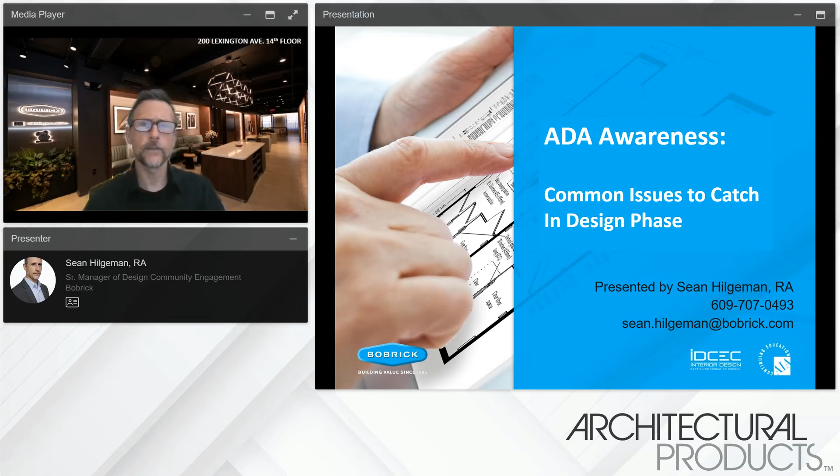Just to give you a background on the presentation, it is derived from our planning guide for accessible restrooms. I think it's included as a download from this presentation, but you can also download it directly from the website. It was written by a gentleman by the name of Alan Gettleman. Alan is a member of the ICC Standards Committee, so he's actually involved in the development of these standards. So this is really from the source. It's not going to be jurisdictionally specific, but we can get down to that granular level of detail in the Q&A, probably in follow-up after the presentation. And again, it is downloadable as a resource. And with that, I will jump right in.

So the description: restroom spaces are common areas of focus in ADA lawsuits. Many of you may have encountered this, where there are individuals who have a lawyer on speed dial and a tape measure, and they catch these issues. And we see a lot of this. We see a lot of change orders. And just to give you a heads up, we're going to share some of these that are the most common that we encounter in the field. They're really pitfalls that can be caught in the design phase.

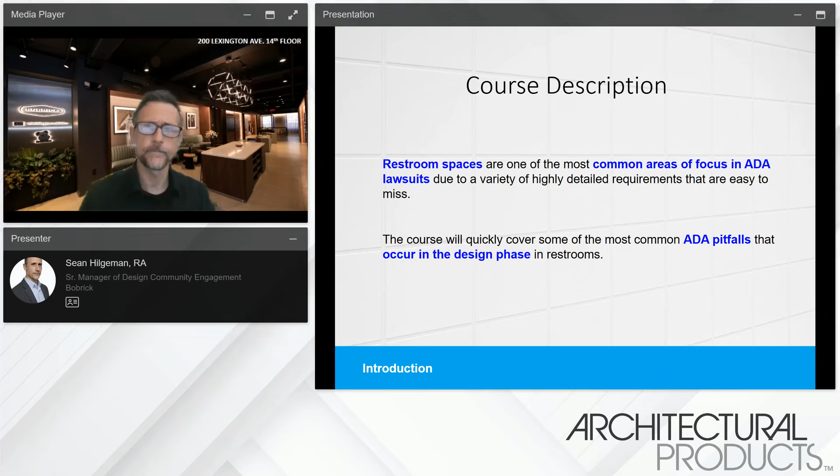Okay. So just to start, we do get a lot of questions about the different codes and standards. And to clarify that, today's presentation deals only with public restrooms. We're not going to go into residential, multifamily, no Fair Housing Act, public restrooms only, because there's plenty of information just in this topic.

So to start, many of you are very familiar with the IBC shown on the bottom right there, that blue document. That is a scoping document. That is really where it all starts for the designer. By scoping, I mean what, where, and how many, as far as requirements for accessibility. The IBC is an ICC, International Code Council, publication. So it is going to refer to the ICC A117.1, which I'll also say ANSI 117.1. That's what the A stands for. It essentially refers out to the A117.1 for technical requirements. So your IBC is your scoping document, what, where, and how many. And then the A117.1 is how high, your dimensions.

And they complement each other. So that's the way these two documents work. They're both publications of the International Code Council. So then you have two versions of the A117.1. You have 2009 and you have 2017. Which one do you utilize?

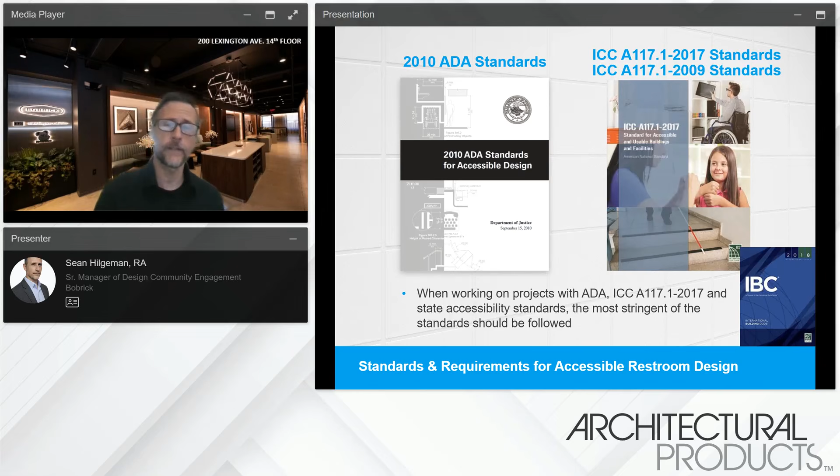But the vertical grab bar in your ADA stall is something that exists in the 2009 ANSI, but it does not exist in the 2010 ADA standards. What that means is if you fail to utilize the vertical grab bar, that is a code violation. It is not a potential civil rights lawsuit. So that's an important distinction. And we'll talk about that as we go through other slides.

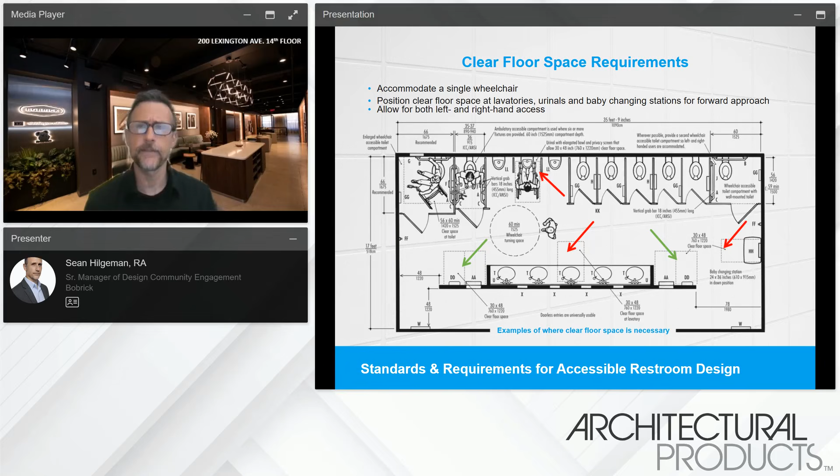All right. So this slide has a fair amount of information in it. Just to start, it is a high volume restroom. What defines it as a high volume restroom is that there's 6 fixtures or more, and that can be 3 urinals and 3 toilets. I think this has 11 or 12, but once it hits that 6 fixture threshold, 2 things are required. The first is that an ambulatory stall, which you can see adjacent to the ADA stall on the left side, is required. And many of you already know what that is. But the ambulatory stall is a requirement in a high volume restroom. You have to have at least one.

The other, this is a very commonly missed requirement. It is something called enhanced reach ranges. And we'll look at this a little closer in an upcoming slide. But once you have a high volume restroom, most jurisdictions require enhanced reach ranges. The primary requirement that you're going to see there is that at least one lav needs to have the ability to turn water on and off and wash the hands within 11 inches from the front edge of the countertop. And we'll look at that again more closely in a moment.

Another note on this slide is that you'll notice that for the most part, it is mirrored. If you have the luxury of this large of a restroom, a high volume restroom is going to have a higher variety of disabilities entering and using it. And you can't assume that all of them are going to be accommodated by just a right hand or just a left hand approach. So by mirroring the restroom, you're actually creating a right hand and a left hand approach to everything in the room. So that is an important note.

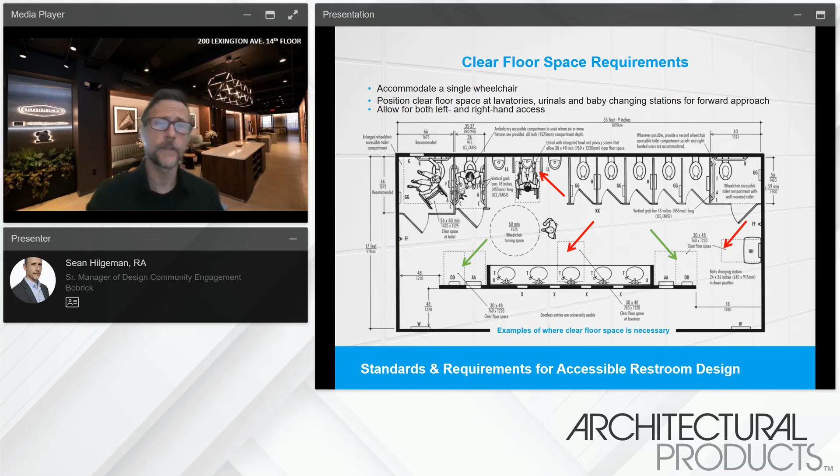So in this case, you can see on the changing station, if a chair is parked there and then another chair is parked at the same time at the hand dryer, you still have your 36-inch clear floor path. So this does happen more often than you'd think, and it's just something to be aware of, making sure you're showing that wheelchair clear floor space on that particular accessory.

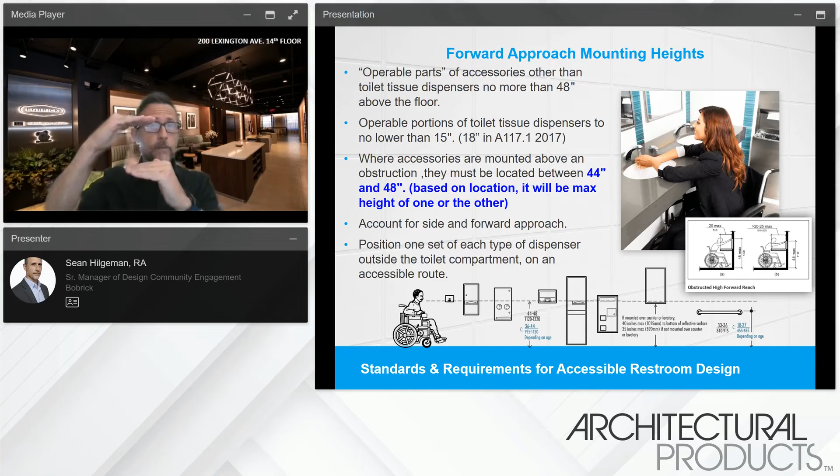Okay, so this is a little bit of a heads up. This slide is talking about the maximum mounting height of the manually operable portion of accessories. And you're going to see in our guide, as well as the standards themselves, this note about 44-48. And it's a little bit misleading because it infers, at a glance, that the manually operable portion of an accessory needs to be set in that 4-inch band between 44 and 48 inches. And that's not what it means.

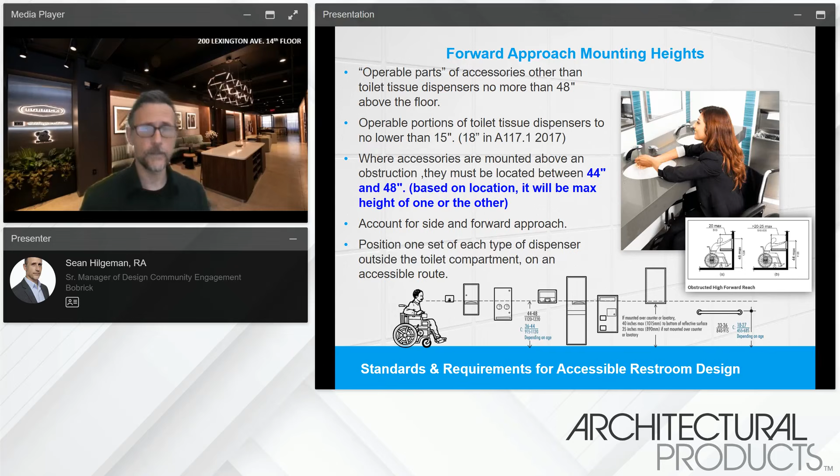For a forward approach, it's going to be either 48 or 44, depending on the situation. And there is a rule of thumb to simplify this because it does get complicated. So the rule of thumb is 100% of the time, your max mounting height for the manually operable portion of an accessory will be 48 inches unless there's an obstruction beneath it. If there's an obstruction beneath it, you have to go in and do more homework. And I'll dig into that as well in an upcoming slide. Okay.

So the important note here is you're setting now your accessory height that we just talked about, and you find that there is an obstruction beneath your accessory. So there's a series of questions that you have to ask, and this is not anything you have to memorize, but as you go back and refresh on it, this will ring a bell. So you have an obstruction beneath your accessory. And the first thing you have to ask is, does this restroom have enhanced reach ranges? If no, you can drop it down to 44. That's for your forward approach.

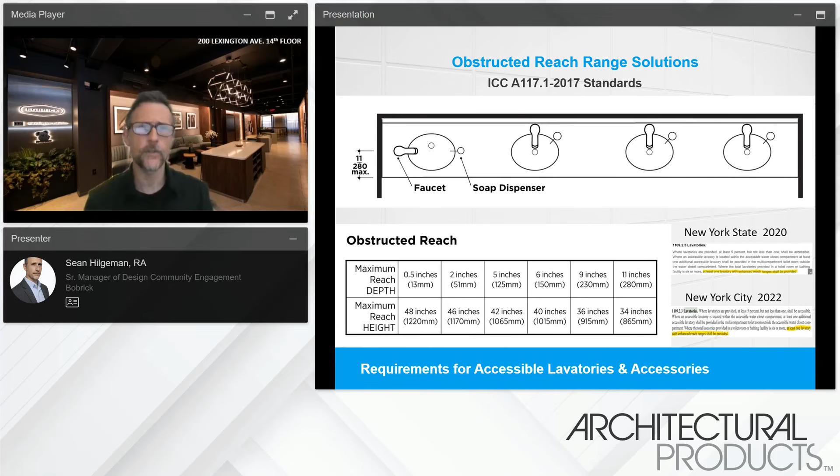If yes, then you have to then ask if you're dealing with a hand dryer or a paper towel dispenser. If the answer is still yes, now you come to this chart that's on the bottom left here, and you can see it's very particular. On the first column there, you can see if you have an obstruction 1/2 inch or larger, which could be 3/4 inch base molding, you actually are required to drop it by 2 inches. That goes from 48 to 46 inches. So the important note is that this is a code violation. It does not appear in the 2010 ADA standards. So it is a code violation. It's not a potential civil rights lawsuit.

Okay. So this is low-hanging fruit for getting stung. We actually have had people waiting at ribbon cutting ceremonies. They go right to the restroom. They go right to the sinks. And the reason is you have a 34-inch maximum height above the finished floor for that counter. And in restrooms, you have sometimes uneven tile. You may have the pour beneath the tile was uneven. You have slopes for floor drains. So there can be a lot of variation. And unless someone has gone through and measured each location to ensure at least one of them is 34 inches maximum, that can be a violation. And this is 2010 ADA, so it can be potentially a civil rights lawsuit.

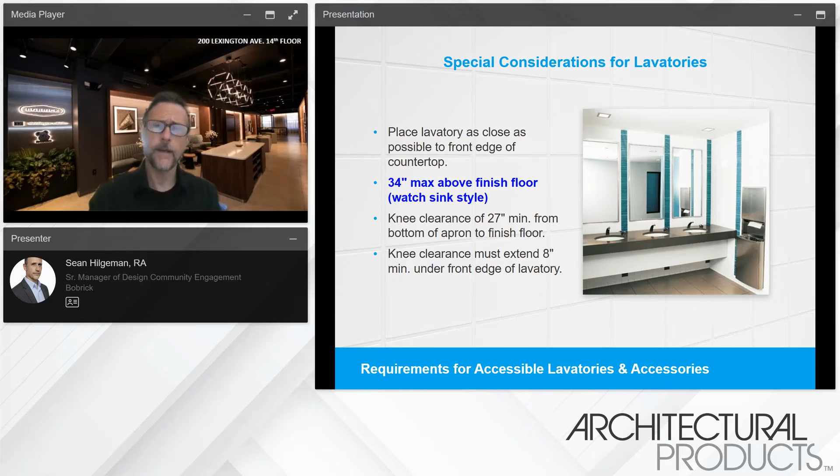So the other thing to be aware of here is that you may have specified an undermount sink, and 2 years later, the owner switches them out to top mount sinks. That measurement is now to the top of the ceramic. And that's another area where you can get stung. So I do share how other offices deal with this. And across the board, the best way to defend against these is to not be pulled into the dispute at all, utilizing office standards. So one office standard you can follow here is to set all of your countertop heights at 33.5 inches to build in tolerance for either undulations in the floor or if you have that top mount sink.

So this is a very common issue, actually, that compromises both ADA and your initial design intent. So over here on the left, assuming there's an ADA sink, your ADA sink is on the far right there, and everything is compliant. However, a lot of maintenance groups do not like using the C-fold towels. And what happens is one of these plastic roll towel units gets glued right on top of it. So, one option is just being aware of this.

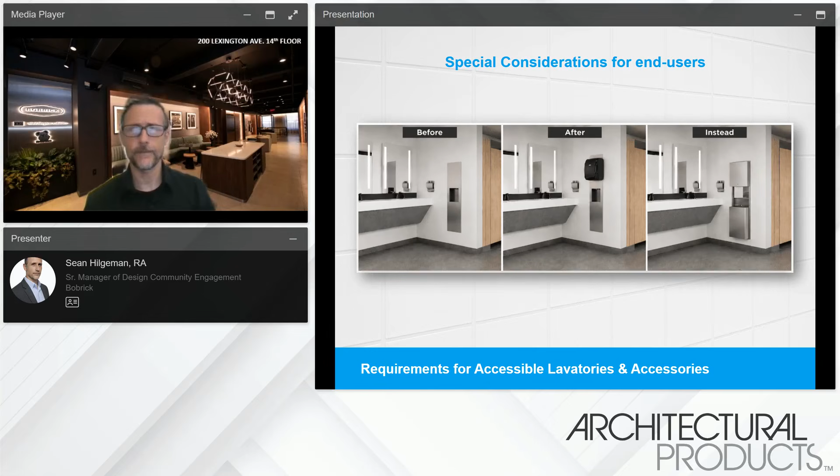You can specify from the beginning an auto roll towel that is not going to get swapped out at a later date.

And that's an example where you ensure that your products being used are compliant dimensionally. You can put them into your box of office standards. If you change it later, vet it again, version B, and you can reuse those on other projects.

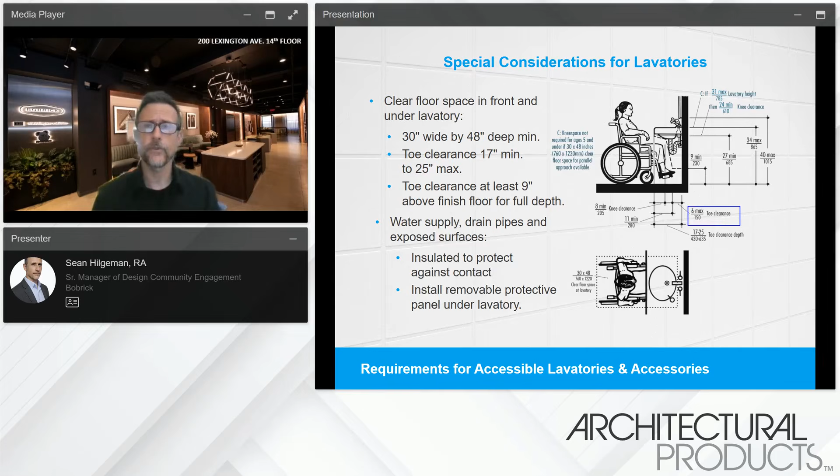Okay, so this is worth memorizing. Anything that needs to be manually operable in an accessible space, and this very often applies to your door levers, but also to your accessories, has to be done so without tight grasping, pinching, twisting of the wrist, and less than 5 pounds of pressure. The accessory shown here is a red flag accessory, and this goes into another topic.

There are a lot of manufacturers who have these accessories that are not ADA compliant, yet they claim they are. And this is really, really important to remember. The manufacturers have these claims all over their websites, on their cut sheets, and there is no individual, there's no organization that reviews and vets and gives them permission to use that claim.

The first line of defense, and the person who's actually taking personal liability, is the architect signing and sealing the drawings. And that's really important because I feel it's unfair, but it is the way the industry is right now. The person signing and sealing, the architectural firm, has to do due diligence on behalf of the manufacturers to make sure that these are code compliant, are ADA compliant, and that their claim is correct.

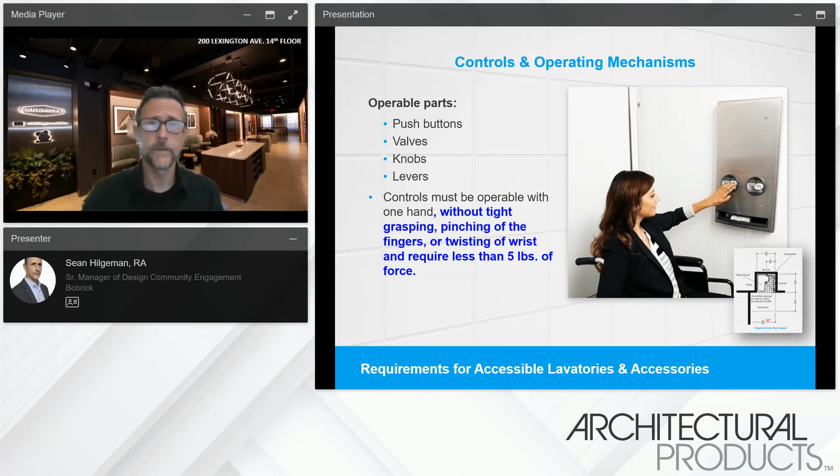There's a little image of a transfer shower there. That's another red flag item because the 36 by 36 prefab bases are often claimed to be ADA compliant, but when the finishes are added, they're not. So that is definitely one. And I've had a number of firms shaking their heads: yes, we're ripping those out right now for that reason.

Okay. This is another important slide. So you are probably familiar with the maximum protrusion into an accessible path of 4 inches. What's important to note is that from 27 inches down, that is not a requirement because it's considered detectable by a cane, and above 80 inches is okay.

Now, this is another one where we have an architect right now ripping out partitions for this reason. So when you are specifying a full height partition to the ceiling, each compartment needs to have a sprinkler, HVAC, and light. So in order to get away from that requirement, you need to drop the top of the partitions 18 inches below the deflector of the sprinkler, which is often 20 inches below the ceiling height.

So what happens there is if your partition system has a headrail, in many cases, your clear opening as you go into the stall is below 80 inches. And this is potentially a civil rights lawsuit because someone with a visual disability is not required to use a separate ADA stall. They can go into any stall.

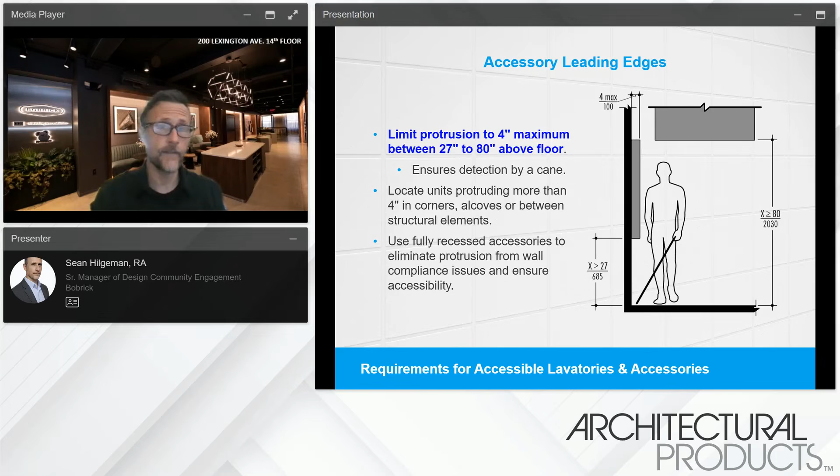So you do want to make sure that the partition system you utilize in those cases does not have a headrail. And we have plenty of options for that. Just want to make sure you do your due diligence, and we're always happy to support on choosing the right system there.

All right, so these, I'm not going to read all these different dimensions to you. They're always there for reference, but two things I'll draw your attention to on this slide. This is the smallest possible ADA stall you can design, and the important note is that the toilet has to be diagonally opposite the door. And the reason is because the individual is intended to transfer on and off the toilet. It cannot be aligned with the toilet. And that does happen very often.

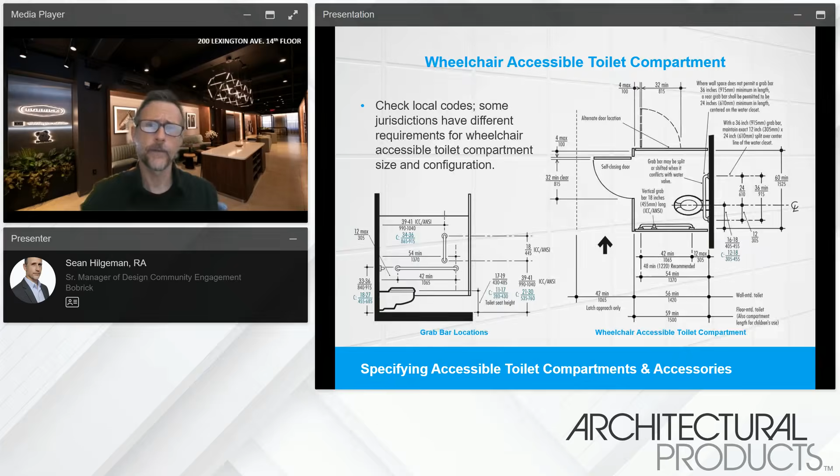This is a really good one. So this is that smallest possible ADA stall we just looked at. From the inside face outward, you are required to have a minimum of 6 inches clearance. You're allowed to have support pieces for the stall itself, but you can't have any building obstructions or any other obstructions in that area. If you want your partition to go all the way to the floor, you can do that by growing the stalls to absorb that toe gap inside the stall itself.

Your ADA stall that you're looking at here typically is set at the end of the run of stalls, against a solid wall, on the side that you see on the left side of the stall there. If you do a 60 by 60 stall right up against a solid wall, you will not have the toe gap. And this is a civil rights requirement.

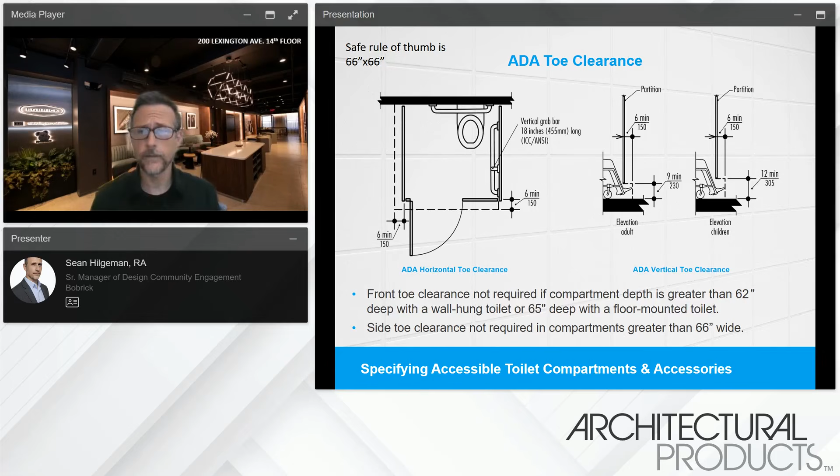This is the largest change order I've seen in a restroom, and it's a really big red flag. So the only way to fix this, because you can't really cut a toe gap into a solid wall, is to move the toilet over 6 inches, then the next toilet, the next toilet, the next toilet, all the way down to what may or may not be the entrance to the restroom. Now your fixture count is off, the whole restroom's being redesigned. So this is a really good one to be aware of early in design.

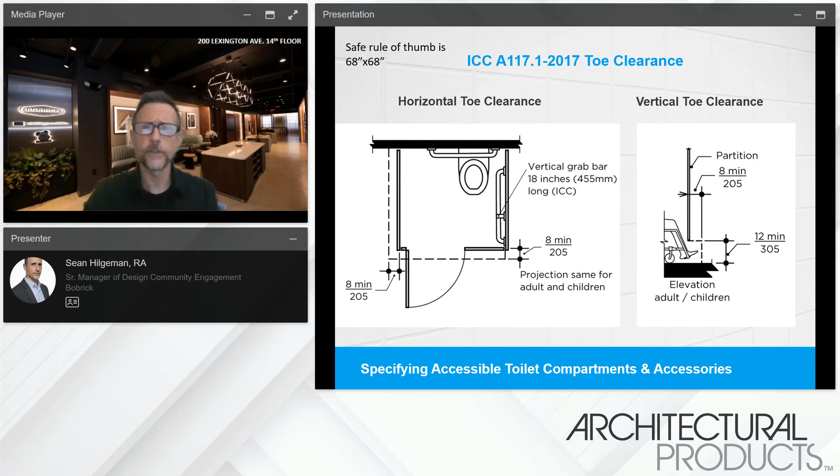66 by 66 is a good rule of thumb for 2009 A117.1. 2017 has grown from a 6 to 8 inch requirement for that toe gap. So a 68 by 68 is a better rule of thumb for 2017. This is also to highlight because 2017 has, for all, whether children or adults, a 12-inch toe gap, right? When everyone's asking for more privacy, you have this huge toe gap. So a lot of designs are enlarging that stall so they can gain more privacy underneath, whether going all the way to the floor or reducing it to a few inches. So in those cases, you do have to grow the stall to 68 by 68.

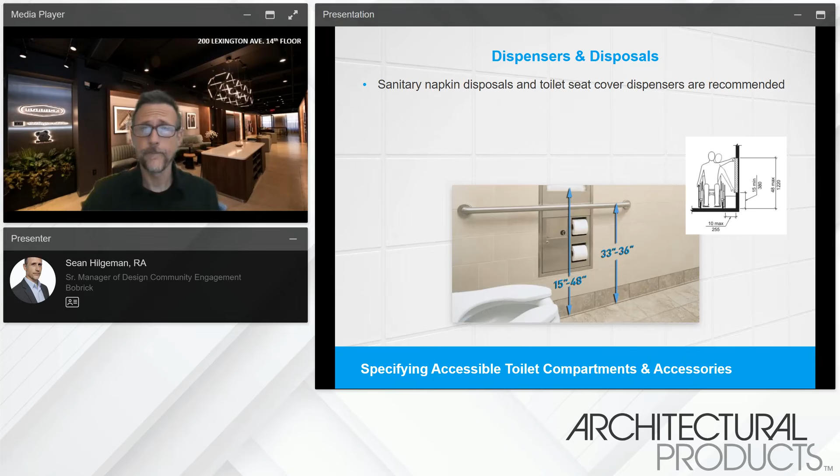This is a nuance about grab bars. When you're designing and you are drawing that grab bar and setting its height in your elevation view, that height is set to the top of the grab bar. However, that exact same grab bar viewed in plan, you're now locating it left and right in plan. It's actually located relative to the center line of the return, the escutcheons. So it's located using two different positions depending on the view. Okay.

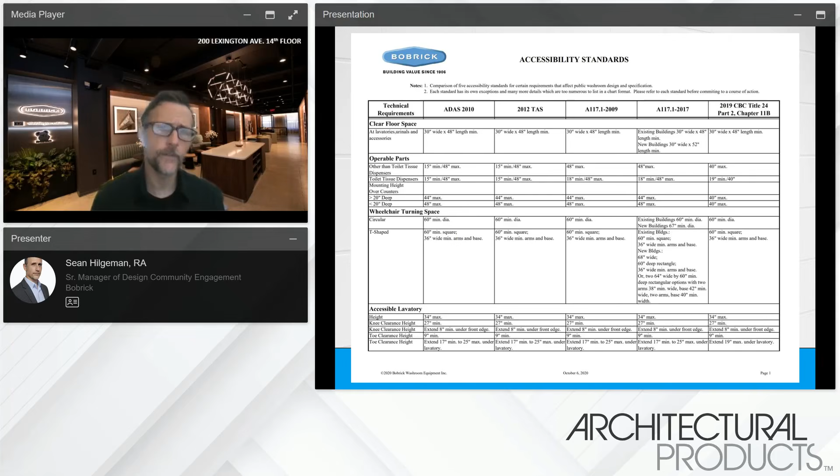So this is one of the charts that we provided for download. It's also available on the website. On the left side are a lot of design elements. On the first column to the right of that is the 2010 ADA, which, as you remember, is almost identical to the 2009 ANSI. That's two columns over to the right. Directly next to the 2009 ANSI is the 2017, so you can really see the differences between 2009 and 2017 there. The second column has Texas, the far right has California. There's a lot of unusual requirements in different states, and we're always happy to help as needed with tracking down those requirements.

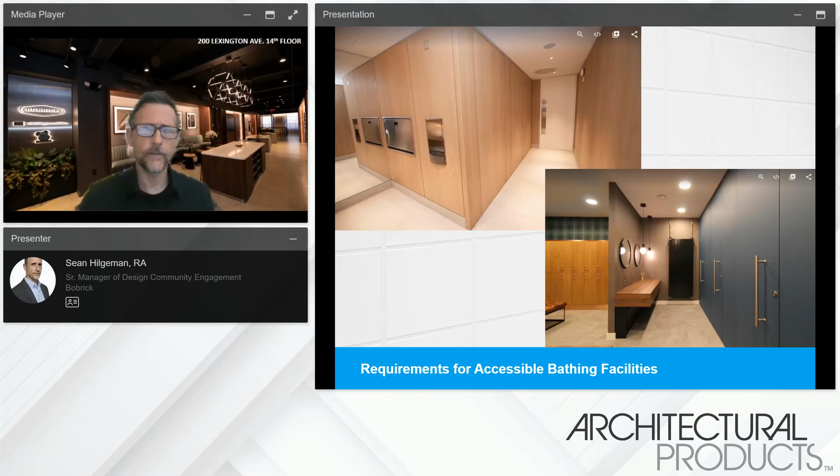This is just an image of some Thrislington installs. Important note, the Thrislington is the one partition type that we use that is more like millwork in that it's fully customizable, as opposed to trying to understand different standard parts and pieces of your other partition systems.